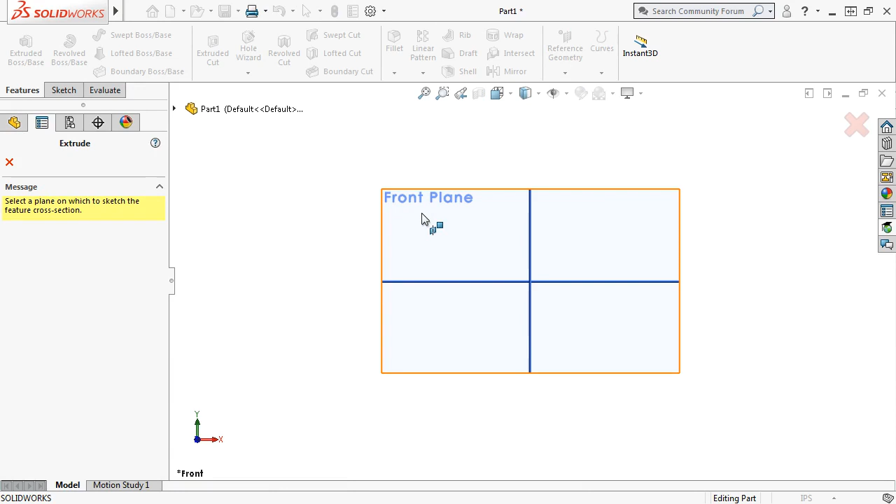I'll select the front plane. Now that I'm in editing sketch mode, you can see that the sketch tools have become active in the command manager. On the front plane, I'll sketch the profile that I need and add dimensions.

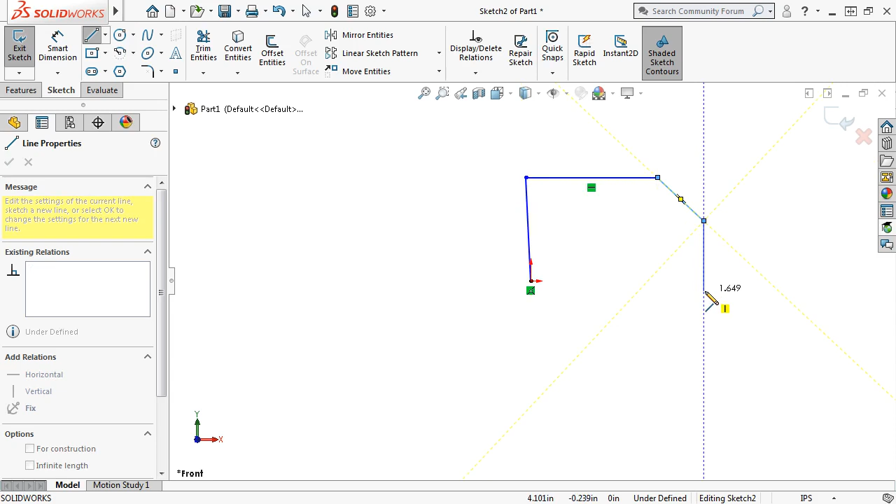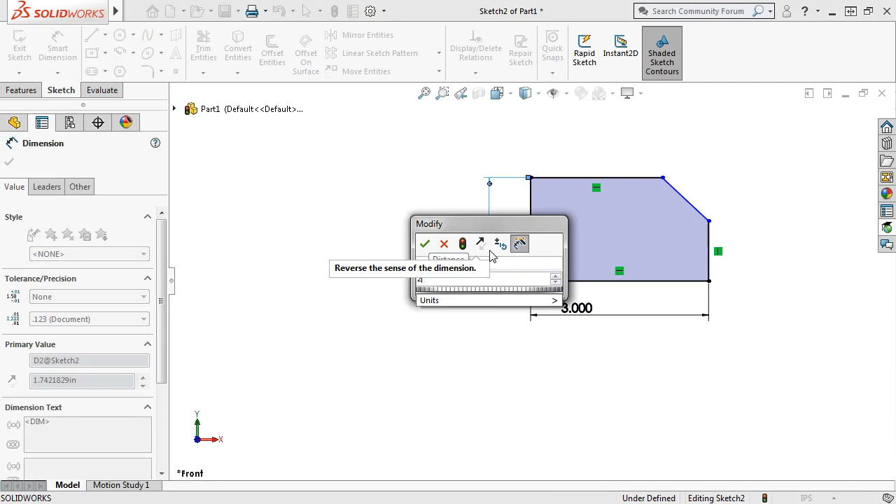Three inches on the bottom, 2 inches, 1.5 inches, and 0.75 inches for the remaining side.

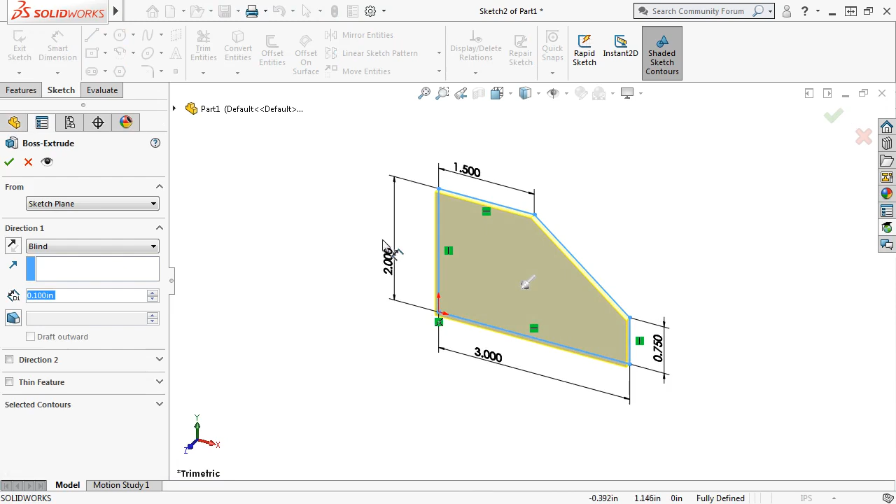Notice that all the sketch entities have changed from blue to black, and the status bar reports that the sketch is fully defined. I'll now exit the sketch, and the Boss Extrude Property Manager becomes available. I'll extrude the sketch to a depth of 5 inches, using a blind end condition, click OK, and the feature is complete.

Earlier I mentioned that there were two different methods that could be used to create this simple shape. A common approach that beginners often take would be to start with a block and then cut the corner off. There's a reason I don't take this approach.

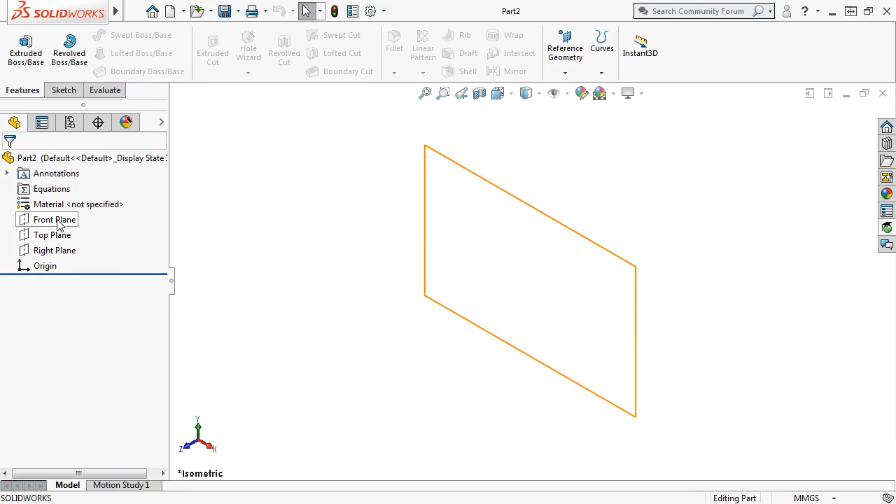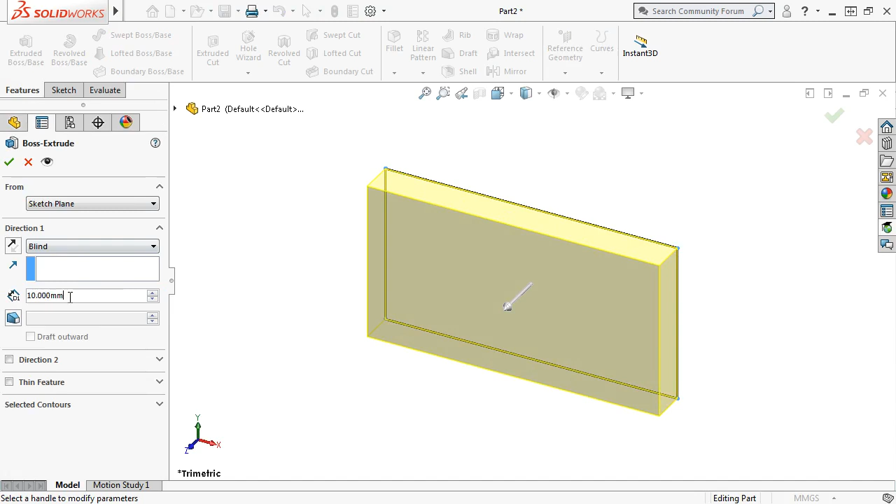If I open a new file, create a block, and create a cut feature.

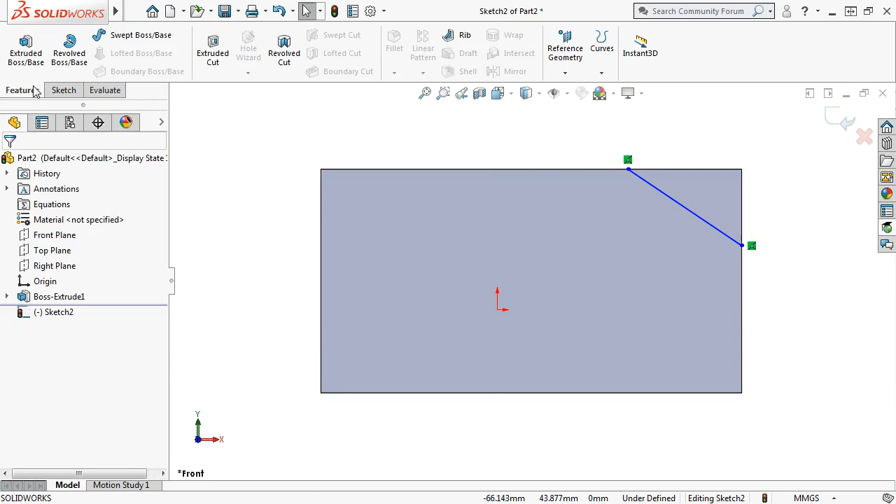You can see that even though I've just created the same basic shape, it took two features to accomplish, while it can be easily done with just one.

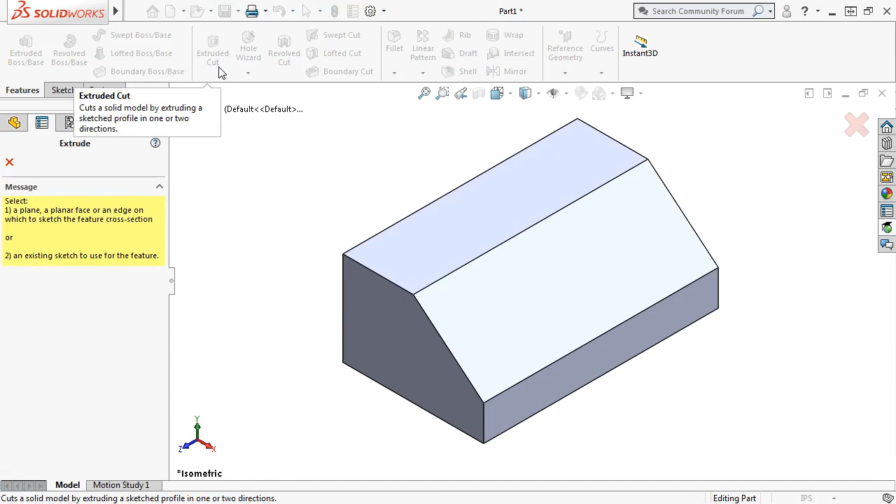Let's continue on with the second feature. This will be the through hole. I'll select the Extruded Cut command, and rather than select a plane, I'll select this face to sketch directly on it. I'll create this feature using the same basic steps as before.

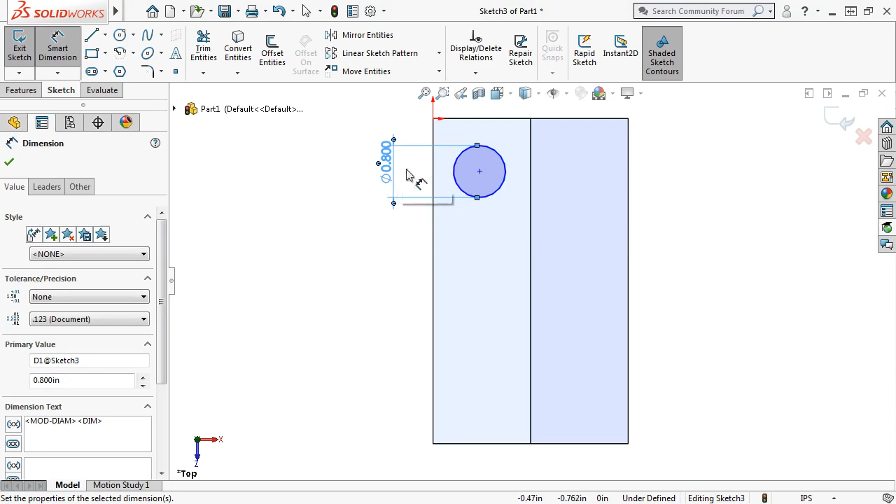First, I'll sketch the profile of the hole and add dimensions. A 0.8-inch diameter, 0.75 inches from the long edge, 1 inch from the short edge, and the sketch is fully defined.

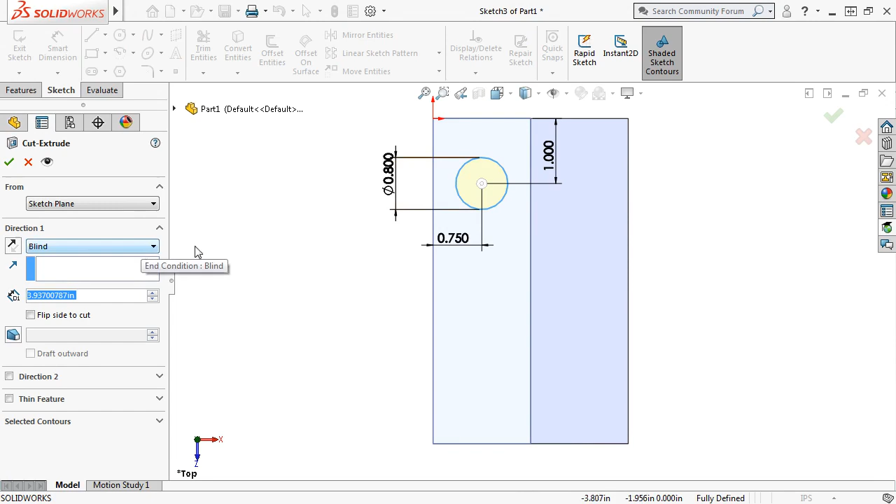I'll exit the sketch to set the feature parameters. Remember that this hole is meant to go all the way through the part. Right now, the blind depth is set to a depth that extends through the part, but what would happen if a design change caused the thickness to increase beyond the depth set here? The hole would no longer go all the way through the part.

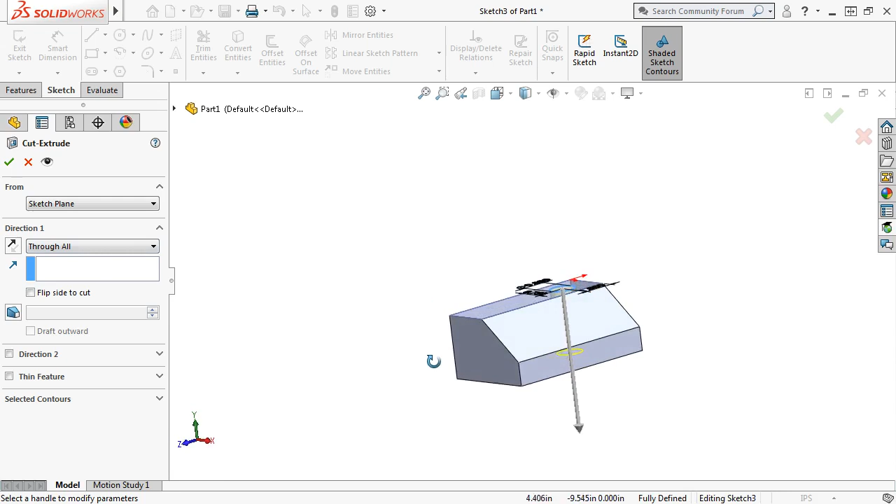It is better to use a through-all end condition to ensure that the hole will always go through the model, no matter what the thickness. This allows you to incorporate design intent into a model.

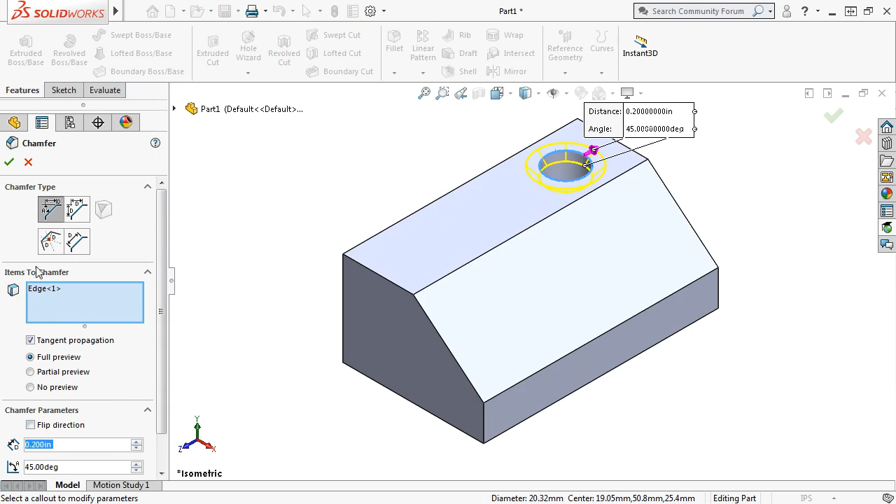After the hole is created, the next step is to add the chamfer to the edge. Remember that the chamfer is an applied feature, so I don't need to create a sketch. I'll simply select the edge and select the chamfer icon from the pop-up toolbar. In the Property Manager, I'll set the distance to 0.2 inches and the angle to 45 degrees. I'll click the green check, and the chamfer is complete.

I'll switch over to the completed part to see what features are left. Next, I need to create this cutout. Notice the rounded edge here. Once again, I'm at a crossroad and have to choose how to achieve this.

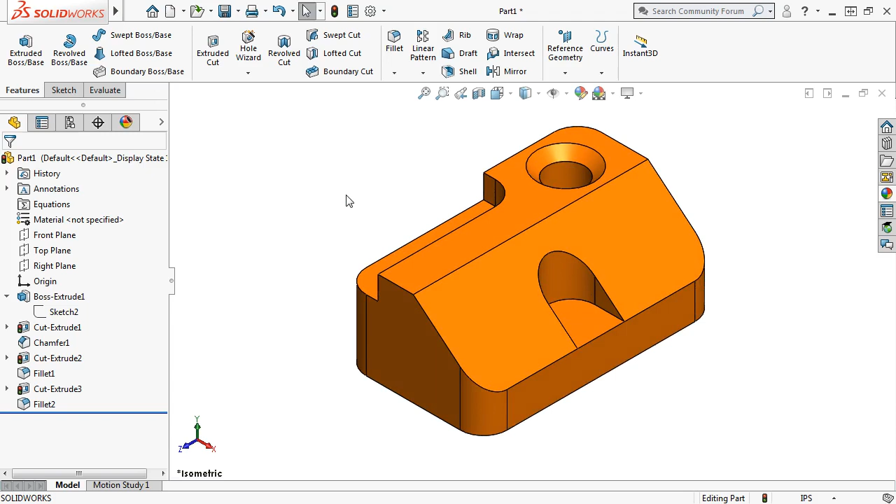I can either design the rounded edge into the sketch of the cut, or I can use a rectangular sketch and then round out the corner with a fillet. In this case, I'll use a fillet to create the rounded edge. I'll start a sketch on the top face and switch to a normal view orientation.

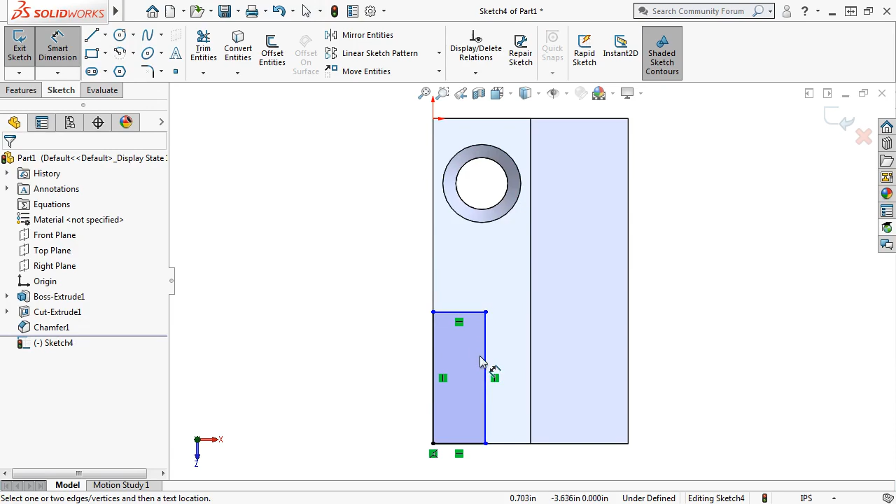Using the Rectangle Sketch tool, I can quickly create the rectangular sketch of the cut I need. Add dimensions of 3 inches and 0.75 inches. I'll extrude the cut 1/2 inch and click OK.

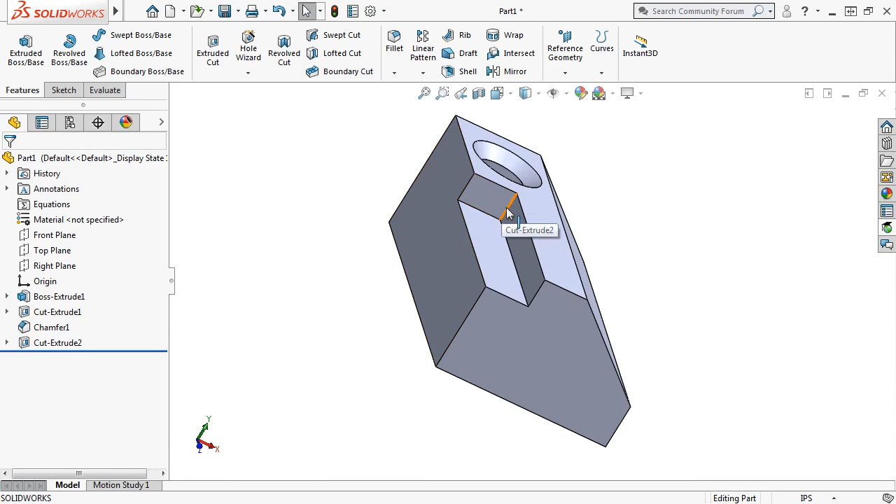I'll select the edge to fillet. Select the fillet feature from the pop-up toolbar and enter a radius of 0.5 inches. The preview looks good, so I'll click OK, and the fillet is complete.